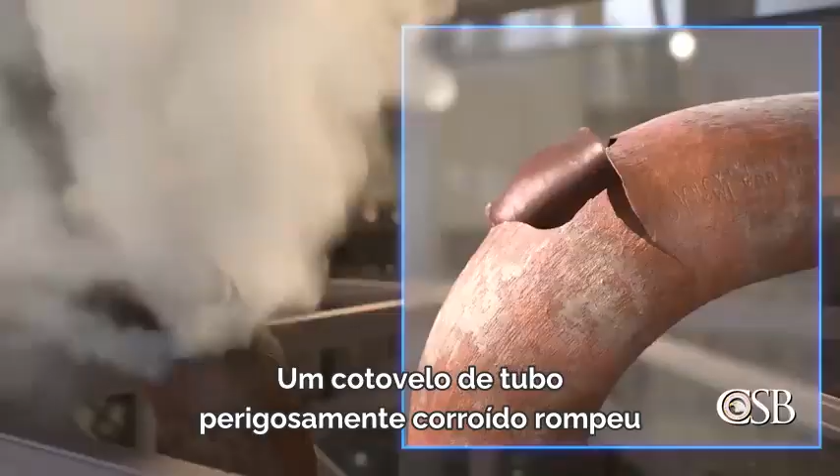June 21, 2019. The Philadelphia Energy Solutions, or PES refinery in Philadelphia, Pennsylvania. A dangerously corroded pipe elbow ruptured, releasing process fluid into the refinery's hydrofluoric acid, or HF alkylation unit. The process fluid then ignited, causing a fire and series of explosions. The fire and explosions caused the release of over 5,000 pounds of highly toxic HF, launched a 38,000-pound vessel fragment off-site, and resulted in an estimated property damage loss of $750 million.

Thankfully, despite the urban location of the PES refinery, the local community was not seriously harmed, but it could have been worse. Our investigation found that a critical safeguard intended to protect the local community from a release of hydrofluoric acid did not function as designed. If a large amount of hydrofluoric acid had escaped from the refinery, the consequences could have been disastrous. This incident should be a wake-up call to industry and regulators to take every step possible to prevent a similar event from occurring.

The Philadelphia Energy Solutions refinery was the largest oil refining complex on the East Coast and could process up to 335,000 barrels of crude oil per day. Within its hydrofluoric acid alkylation unit, the refinery produced alkylate, a high-octane blending component of gasoline. That was done by using hydrofluoric acid as a catalyst.

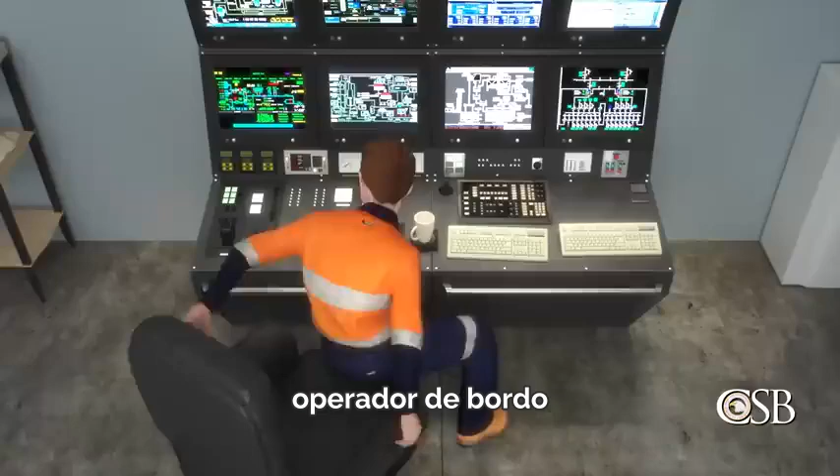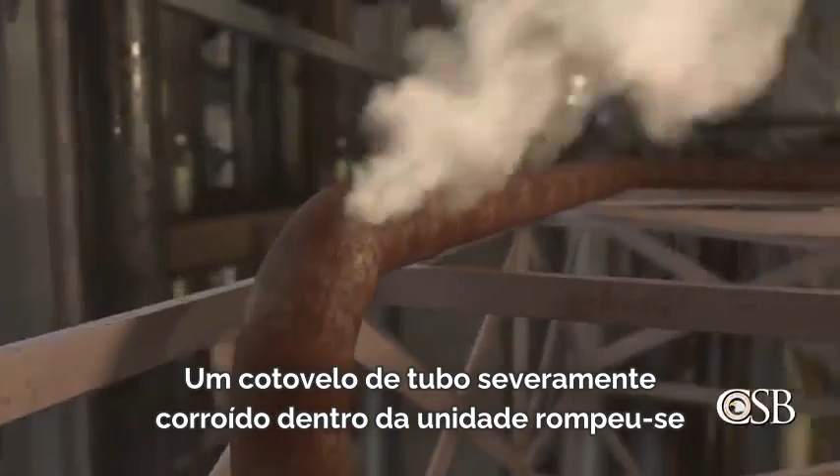On the day of the incident, the HF alkylation unit was operating normally. Shortly before 4 a.m., a board operator in the refinery's main control room performed a routine change in the configuration of the process within the unit. The operator increased the flow of process fluid in an area of the unit by a total of 7 barrels per hour. Stable operation continued, with no abnormal pressure or temperature changes in the unit as a result of these actions. But nevertheless, at 4 a.m., a severely corroded pipe elbow within the unit ruptured.

Flammable process fluid containing mostly propane, along with a small concentration of HF, escaped through the failed pipe elbow. The leaking process fluid formed a large ground-hugging vapor cloud, about 10 feet high, that engulfed a portion of the unit. Moments later, the vapor cloud ignited, causing a massive fire.

Approximately 30 seconds later, the board operator took steps to prevent the release of additional HF. This was done by rapidly draining the unit's 339,000 pounds of hydrofluoric acid to a special vessel called the Rapid Acid De-Inventory, or RAD drum. The RAD drum was designed to safely hold HF in the event of an incident.

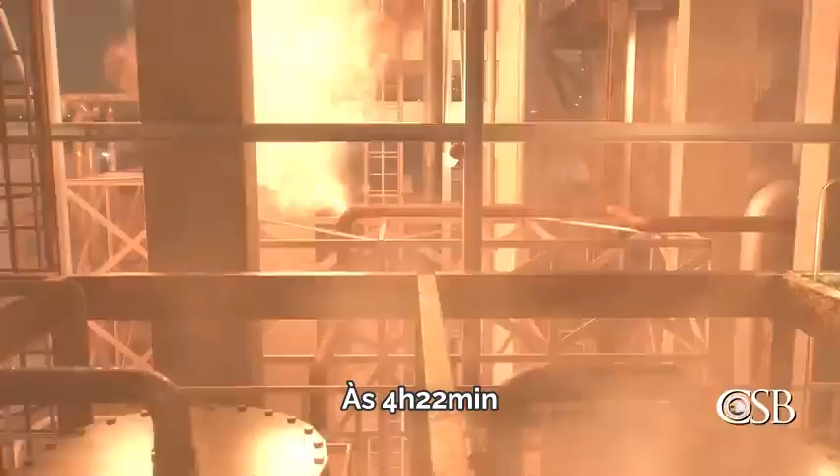At 4:15, due to the ongoing fire, an explosion erupted in the alkylation unit. 4 minutes later, a second explosion occurred. At 4:22, the process vessel in the unit containing flammable hydrocarbons violently ruptured, causing the third and largest explosion. A giant 38,000-pound fragment of the vessel flew across the Schuylkill River and landed on the river's opposite bank. 2 other fragments, one weighing about 23,000 pounds and the other about 15,500 pounds, landed inside the refinery.

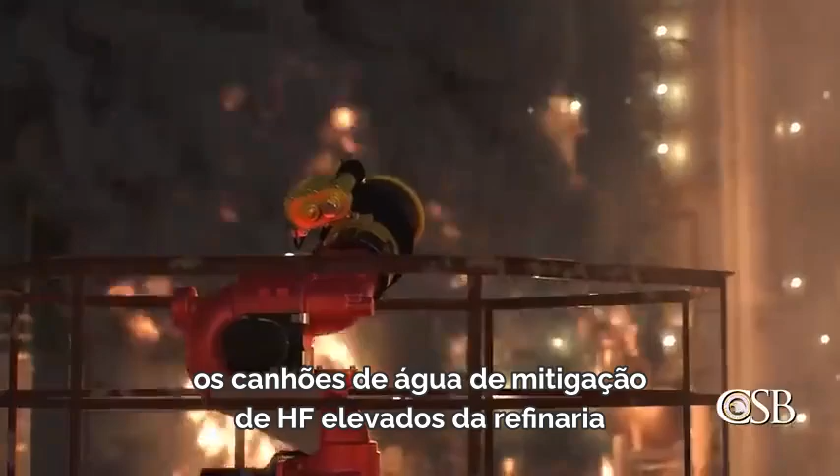The fire knocked out the control system communication to the refinery's HF water mitigation system, and the backup power supply to the system also failed. As a result, the refinery's elevated HF mitigation water cannons, which were designed to spray high volumes of water to help contain an HF release, could not be turned on remotely from the control room. The water mitigation system was a critical safeguard at the refinery, designed to prevent released HF from going off-site.

About 40 minutes after the release began, the refinery shift supervisor, wearing bunker gear, entered the unit and manually turned on a pump that allowed the HF mitigation water cannons to operate. Other refinery workers closed valves to stop the flow of hydrocarbons and steam into the unit. The fire burned for over 24 hours until it was finally extinguished the following day at about 8:30 a.m.

5 workers sustained minor injuries during the incident and response. The CSB is unaware of anyone off-site experiencing health impacts from the hydrofluoric acid release.

The CSB launched an investigation into the fire and explosions and found 5 key safety issues contributed to the severity of the incident. They are mechanical integrity, verifying safety of equipment after changes to good practice guidance, remotely operated emergency isolation valves, safeguard reliability in HF alkylation units, and inherently safer design.

The first safety issue is mechanical integrity. The CSB determined that the pipe elbow that failed had corroded faster than other piping in the HF alkylation unit.

That is because the steel pipe elbow contained a higher content of nickel and copper than other piping in the unit. Carbon steel is commonly used in HF alkylation units, but is known to be susceptible to hydrofluoric acid corrosion. In refinery processes using some amount of HF, hydrogen fluoride reacts with iron in steel piping to produce iron fluoride.

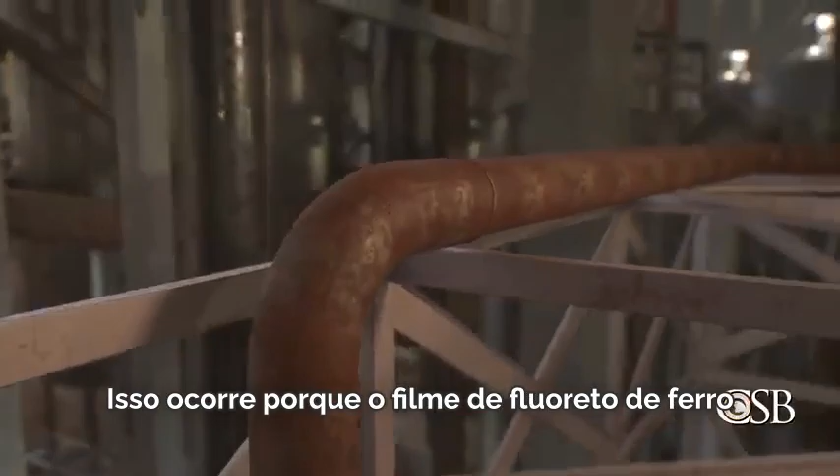The iron fluoride then forms a film that coats the inside surface of the piping and protects the steel from corrosion. However, if the steel contains high concentrations of copper, nickel, or chromium, known as residual elements, the rate of corrosion is often higher. This is because the iron fluoride film that forms on steel containing high amounts of residual elements is less protective. The pipe elbow that ruptured in the PES refinery was installed around 1973.

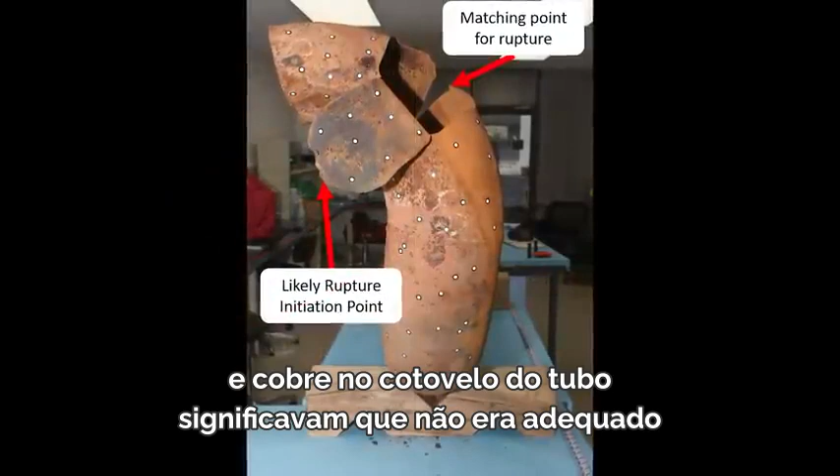It had originally been constructed of a particular steel alloy that intentionally contained a higher concentration of nickel and copper. But by current industry practices, the high concentrations of nickel and copper in the pipe elbow meant it was not fit for service in a process using hydrofluoric acid. Yet the pipe elbow remained in service for over 40 years, corroding at a much faster rate than adjacent piping components that did not have high concentrations of residual elements.

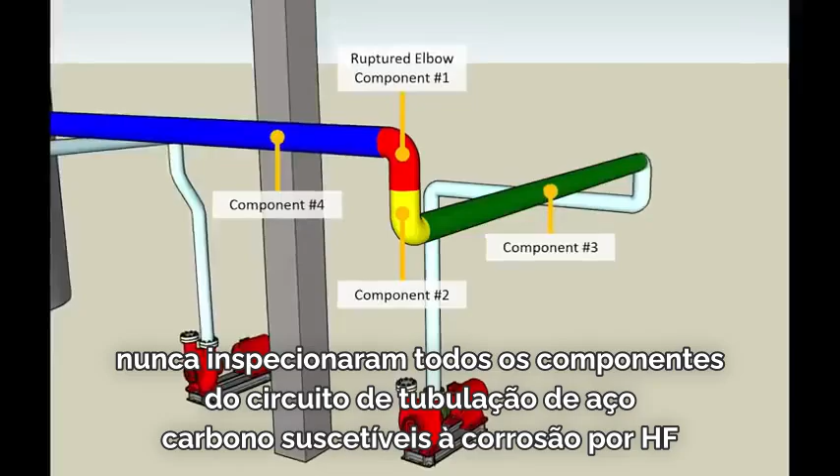The CSB also found that PES and the previous owner of the refinery never inspected all carbon steel piping circuit components susceptible to HF corrosion. Such a program was not required in the standards set by the American Petroleum Institute, or API, for the safe operation of hydrofluoric acid alkylation units.

But had PES or the former owner inspected all of the carbon steel piping circuit components susceptible to HF corrosion in the unit, they may have identified that the pipe elbow was corroding at a faster rate than adjacent piping components, which could have prevented the incident.

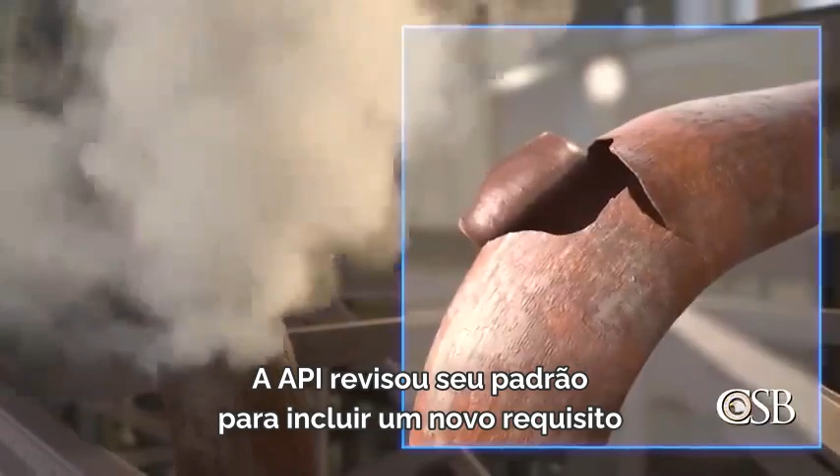After the incident, API revised its standard to include a new requirement for companies to develop a special emphasis inspection program to identify areas of accelerated corrosion in their refineries. The new API Special Emphasis Program requires companies to inspect all individual carbon steel piping components in HF corrosion zones.

This will prompt refineries to find any components that are corroding at a faster rate. This is an important safety requirement developed by API, and it should help prevent future catastrophic failures from this known safety hazard. The second safety issue identified by the CSB involves verifying the safety of equipment after changes to good practice guidance.

When the pipe elbow was initially installed in 1973, the standard set by ASTM International for carbon steel piping did not specify limits on nickel or copper content. Over the next decades, that standard changed, and by 1995, the ASTM standard had been revised enough that the pipe elbow no longer met its requirements due to the elbow's high levels of nickel and copper.

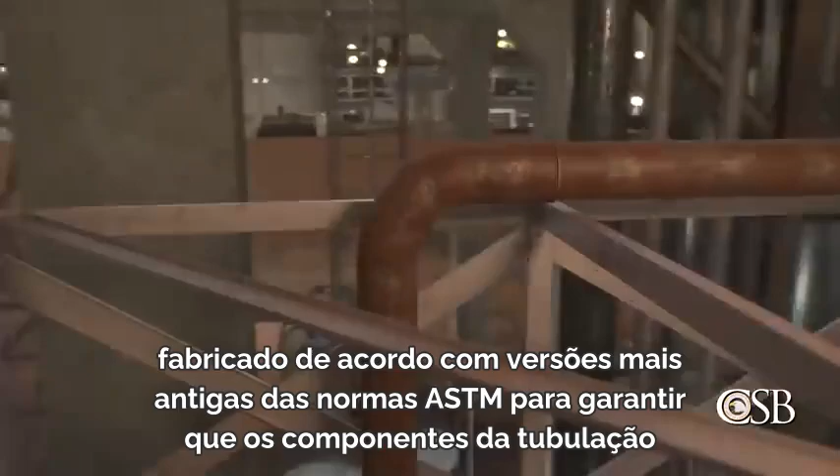Yet neither PES nor the previous refinery owner performed a comprehensive evaluation of all installed HF alkylation unit piping components manufactured to older versions of ASTM standards to ensure that the piping components were still safe to use.

To prevent catastrophic incidents, companies and industry trade groups must take swift action to ensure process safety when new knowledge on hazards is published. These actions must include ensuring that facilities built before the new knowledge was published are still safe to operate. Ensuring safety can include 100% inspection of all equipment and piping, equipment replacement, and other changes needed to prevent loss of containment events.

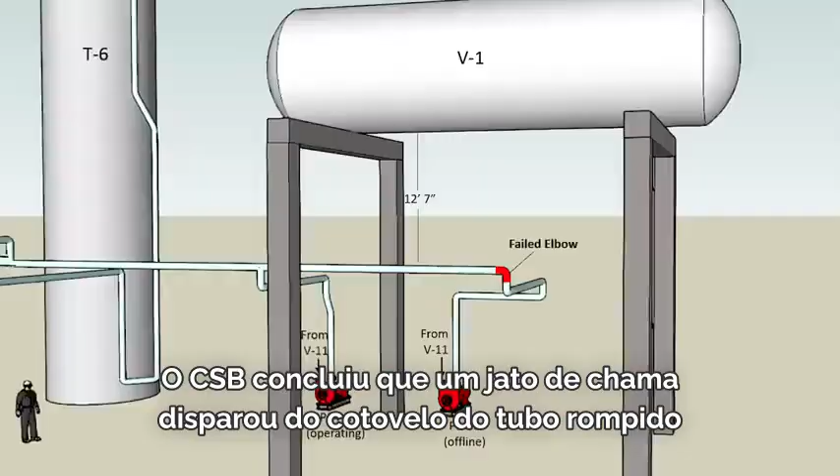A third safety issue discovered by the CSB concerns remotely operated emergency isolation valves. The largest of the 3 explosions at PES occurred when a vessel located above the failed pipe elbow violently ruptured. The CSB concluded that a jet flame shot from the ruptured pipe elbow and heated the bottom of the steel vessel, which contained a large amount of flammable hydrocarbons.

For over 20 minutes, the jet flame erupted from the failed pipe elbow, weakening the steel bottom of the vessel and causing it to stretch and thin. The vessel then ruptured, launching 3 huge fragments into the air.

The CSB found that there were no emergency isolation valves installed in the HF alkylation unit to remotely isolate nearby hydrocarbon sources that could then flow through the failed elbow. And these valves are not explicitly required by the current API standard on safe operation of hydrofluoric acid alkylation units.

Prolonged releases and fires in HF alkylation units can cause equipment ruptures, compromise safeguards, or lead to releases of toxic hydrofluoric acid.

Companies need to install remotely operated emergency isolation valves to quickly stop releases before they become catastrophic events. As a result, the CSB made a recommendation to API to update its standard on safe operation of hydrofluoric acid alkylation units to require installation of remotely operated emergency isolation valves on the inlets and outlets of all hydrofluoric acid-containing vessels, and any hydrocarbon-containing vessels meeting defined threshold quantities.

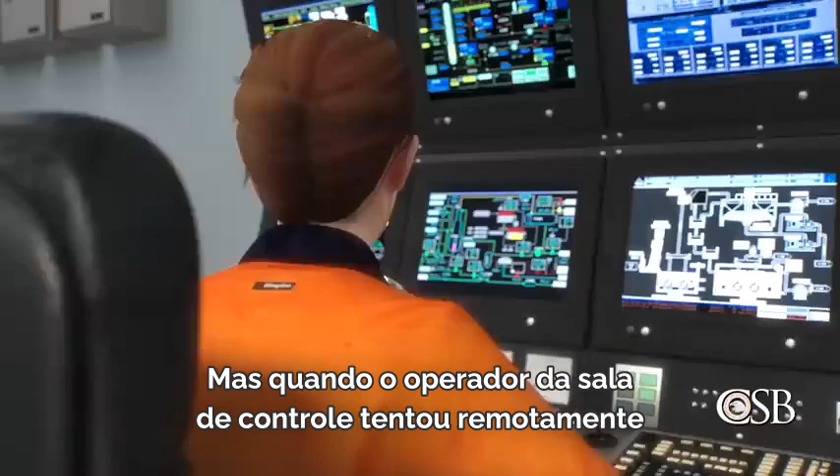In order to suppress the amount of vaporized HF so that it could not travel off-site to neighboring communities. But when the control room operator tried to remotely turn on the water pumps that fed the water cannons, it was not possible because the control system communication to the water pumps, as well as a backup power system in the unit, had both failed during the initial fire. Although API recommends fireproofing these elements, it does not specifically require companies to do so. Instead, 40 minutes elapsed from the time of the release before a worker was able to manually turn on the pump.

In the meantime, highly toxic HF was able to freely escape from equipment and vaporize into the air. Hydrofluoric acid alkylation units present unique hazards due to the presence of highly toxic HF alongside large quantities of flammable materials within one unit. The damage to the water spray mitigation system at PES demonstrates that active safeguards, or safeguards that require a person or technology to trigger their activation, have the potential to fail in major incidents involving fires and explosions.

Critical safeguards and their associated control system components must be protected from fire and explosion hazards. As a result, the CSB made an additional recommendation to API to update its standard to require protection of critical safeguards and associated control system components from fire and explosion hazards, including radiant heat and flying projectiles.

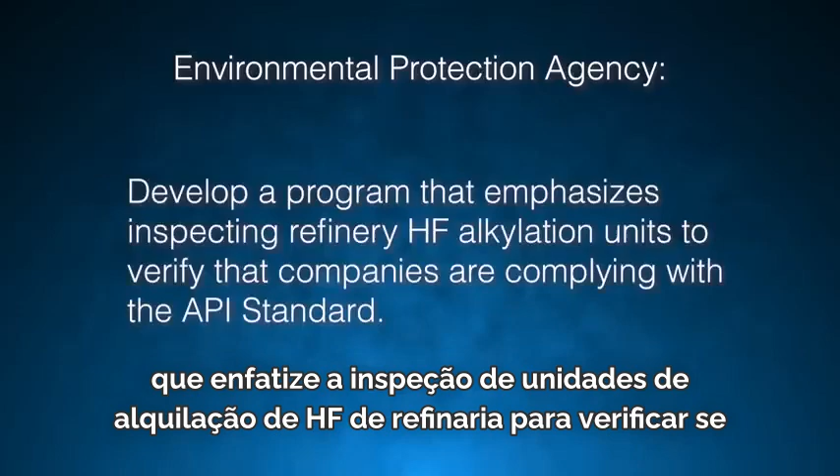And to help ensure that new API safety requirements and recommendations are implemented effectively nationwide, the CSB recommended that the EPA should develop a program that emphasizes inspecting refinery HF alkylation units to verify that companies are complying with API's standard. The fifth and final safety issue highlighted by the CSB in its report on the incident at PES is inherently safer design.

Of the 155 U.S. petroleum refineries currently in operation in the United States, 46 operate HF alkylation units. But hydrofluoric acid is highly toxic and is one of the 8 most hazardous chemicals regulated by EPA's RMP program.

The other acid catalyst used in refinery alkylation units is sulfuric acid. Although sulfuric acid is highly corrosive and can cause skin burns upon contact, it remains a liquid upon release. Therefore, it does not present the same risk to surrounding communities as HF, which vaporizes upon release and has the potential to travel off-site. In addition, alternative alkylation technologies have been developed.

These include a solid acid catalyst as well as the new ionic liquid acid catalyst, which was developed by Chevron. Using a sulfuric acid catalyst or other new alkylation technologies would prevent off-site human exposure to HF in the event of future incidents. Replacing highly toxic chemicals with less hazardous chemicals is an inherently safer design approach.

Currently, there is no federal regulatory requirement for refineries to analyze inherently safer design strategies to reduce the risk of serious accidental releases. Technologies are being developed that could be safer alternatives to HF alkylation, and refiners should periodically evaluate these available technologies. In its report, the CSB recommended that the EPA require petroleum refineries to conduct a safer technology and alternatives analysis as part of their process hazard analysis.